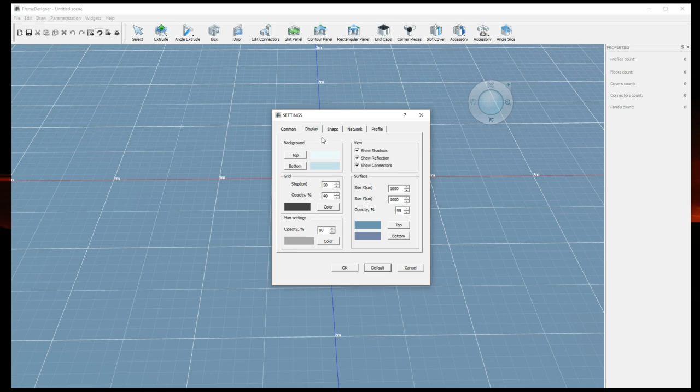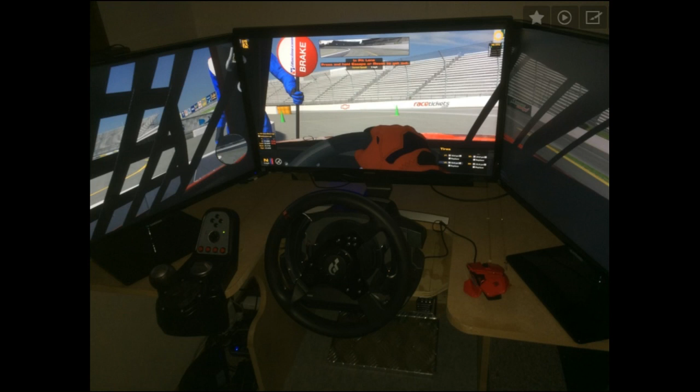So we've got to make it work, and here it is from an almost seating position. Now you can see, it's a T500 and T500 pedals. Since then I have upgraded to an OSW and HE pedals.

This is why I need to build a new one, as this wooden rig just isn't up to purpose anymore. It's getting shook to bits. My monitors shake every time I go over a bump. So as much as I love my little rig here that I built, it's time for it to go.

So let's get started here. As I said, I'm restricted for space, but let's start. I will be building the base. If you click on extrude here, click on the arrow, I'll be building the base out of 40mm profiles, so 40 by 80 for the base.

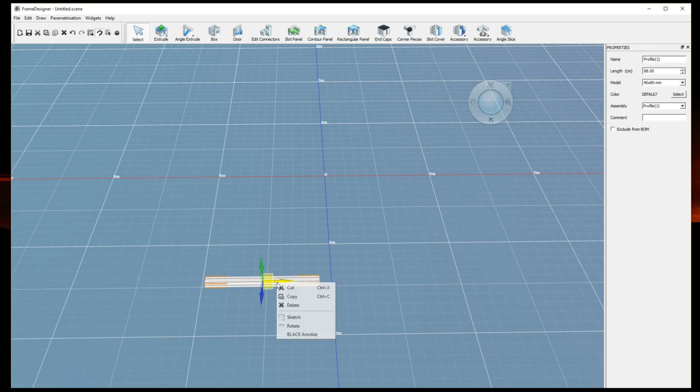And so this would be the wall-to-wall section, which is 1.4. Oh, let's delete that. Well, first let's just show you how to use the program. So this is right click of the mouse and holding it, and I can rotate my window. Center button, I can click and I can drag the window. And we'll show you the rest just in a moment.

So extrude, let's say 40 by 80. So we'll click and we'll drag, and I need to be 1.45. Finish width, 1.45. That's not right, it's 1.405, sorry, so it's 1.405, there we are.

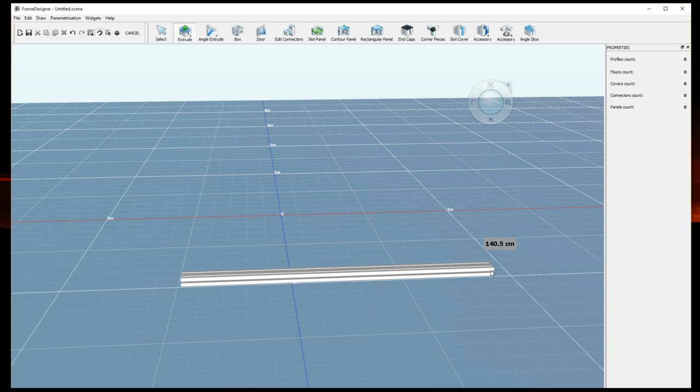So it's lying flat here, which is no good for me. I need it on its end. So if I right click, press rotate, and we'll rotate the red one, it'll stand on its end. So that's one side.

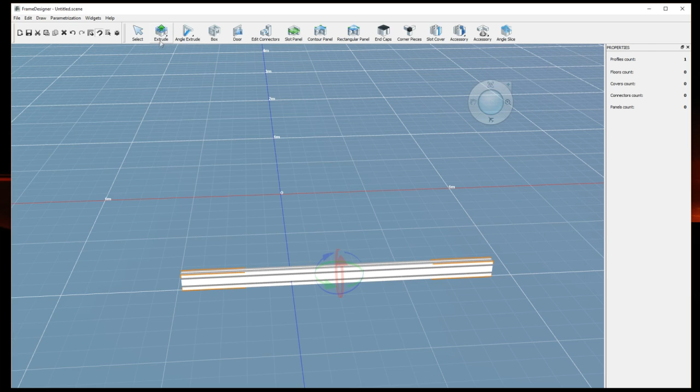Width now I can add in, so let's extrude again, same thing. Let's rotate that round, all the way to the end. This needs to be 505.

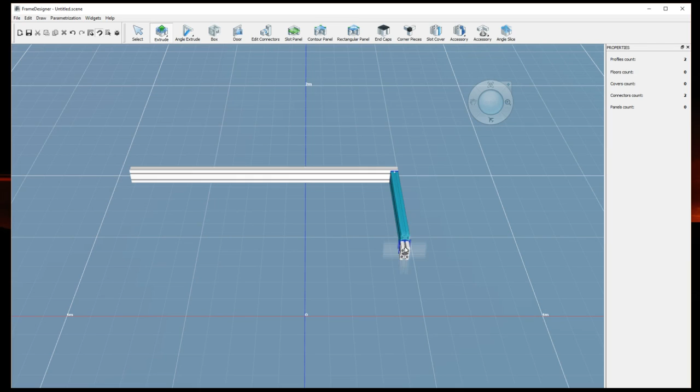And again, I can just copy this one, copy it, Control V to paste, and snap it to the end there. This one again, I can copy it, Control V to paste, let's just make sure we're putting it in the right place here.

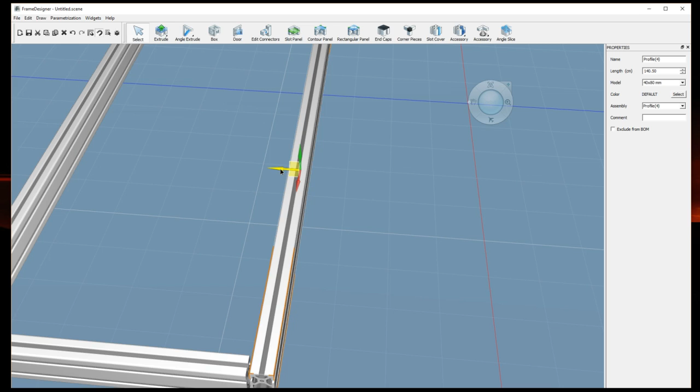So it doesn't look like I've put this right. See the blue section here, that means that it's connected. So that means I haven't put this in the right place. So if I left click on it, I can use the arrow to drag it into position, and there's the, you see the blue here? It's connected now.

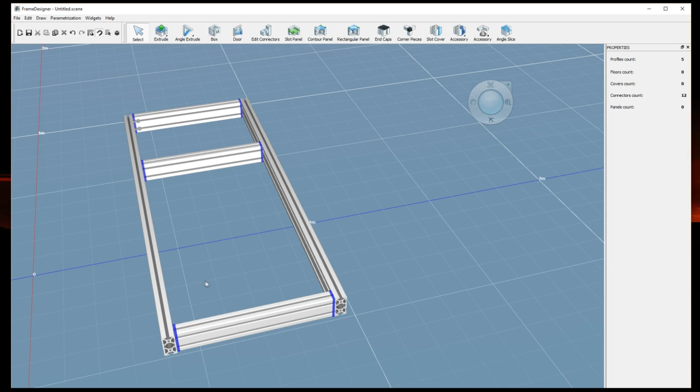Control V again, just for another one of these. So that would be my pedal spacing, well, my pedal deck, and Control V again, and here is basically where my seat will be. So these can move, they don't need to be exact at the moment.

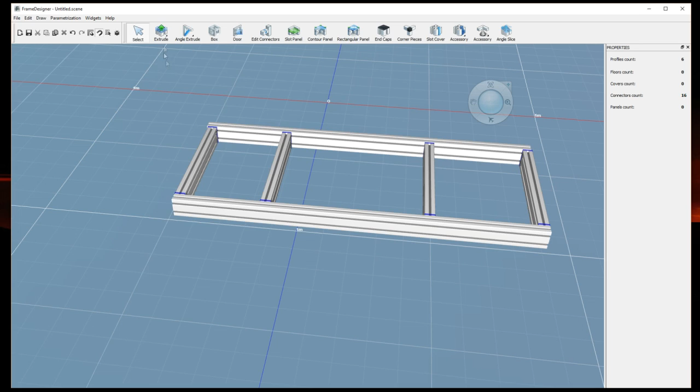So next up, what we need is our uprights for our monitor stand. So again, let's extrude. Do you see if I put it next to the material it's trying to come out, it's trying to extrude out the way, so I extrude off it, and then I can move it. Once I get it to the right height, I can move it to where I need it to be. So for these, I need 112 high for my monitors.

Let's go. There we go.

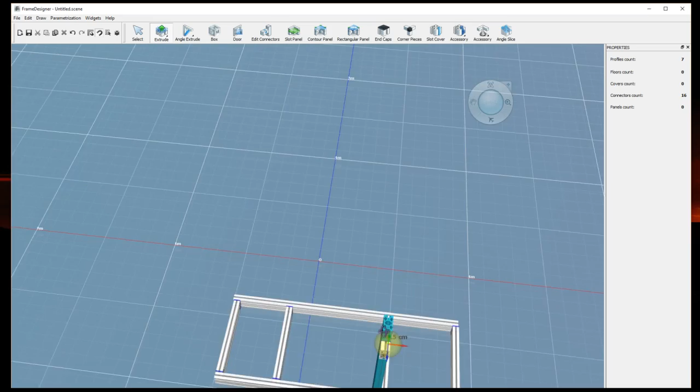Again, it's not obviously in the right place, so we want to rotate that. Use the green one this time, and then we want to move it till it meets this on the outside. So using the arrows again, and see it snaps into place there.

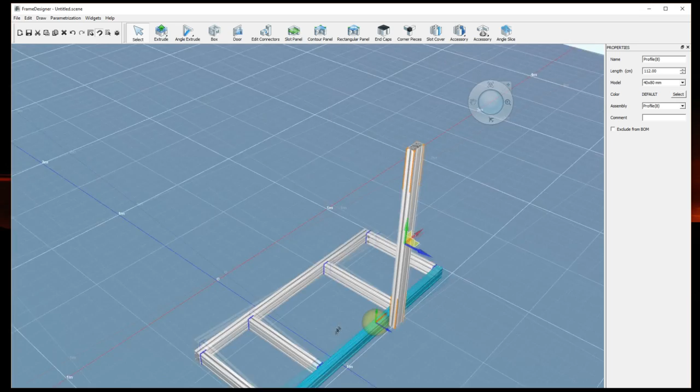Excuse my kids screaming up the stairs.

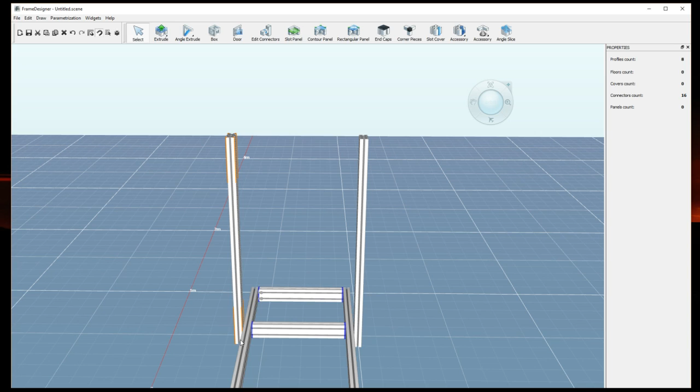So yet again, copy. Control V to paste, there we are. And let's just move it into the right position.

There we are. So at this point I will save it to make sure that there is an autosave getting made. So we'll save it here as video rig.

You see here I've actually already built this, but for the purpose of the video we'll start again. So now it should keep auto-saving every 3 minutes, so when it does crash, because believe me it will crash, at least I shouldn't lose too much work.

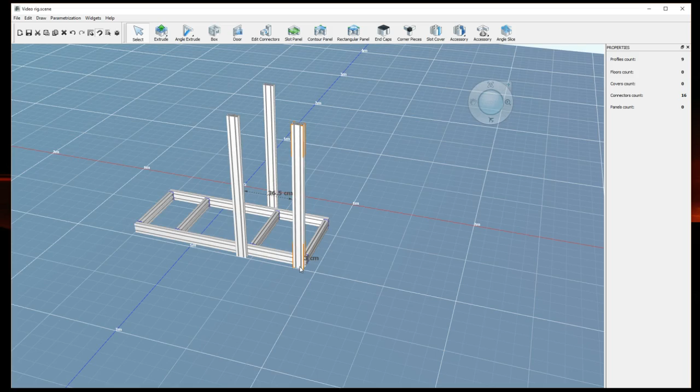So again, I can copy these and paste them in for the back, but what I'm going to do here is I'm going to change the height of these at the back, because they don't need to be that size.

So if I right click on it, I can stretch it and actually shrink it to my dimension that I want, which should be, I have it written down here, 585. And just click off it and done.

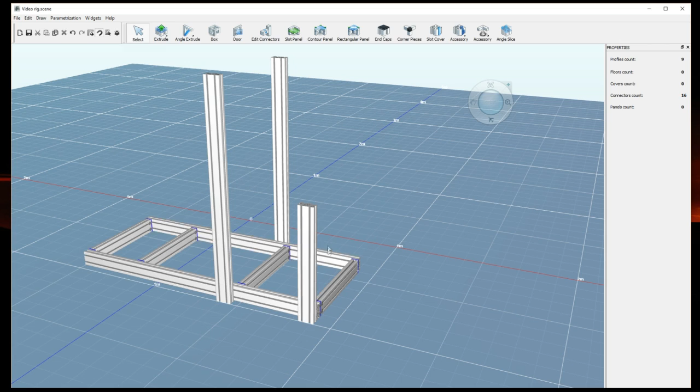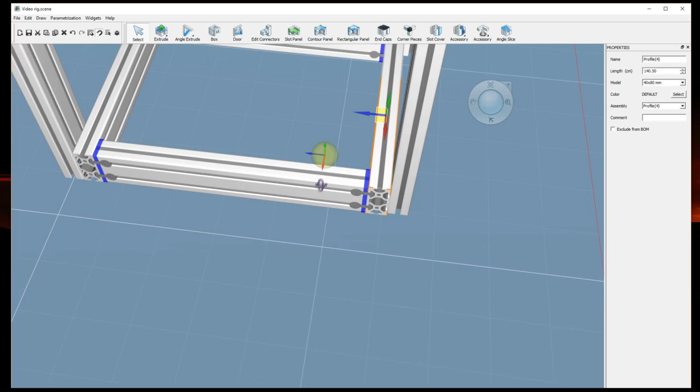So copy that one, paste it, and click it in there. I think I noticed there that that's not quite right, so this one I need to move. There we go, see the connectors there show that it's square at that point. I don't know if it matters that much though.

And now we can start doing my tabletop here. So that's a lot of the structure that's going to take most of the weight. That's why I've done it in 40/80. The rest of it I'll do in 40/40.

So click to there, and again that's not in the right place either, but we can move it. So I need another one of those across the middle here for the back of my pedals, because I invert my pedals, so like that. And on this side.

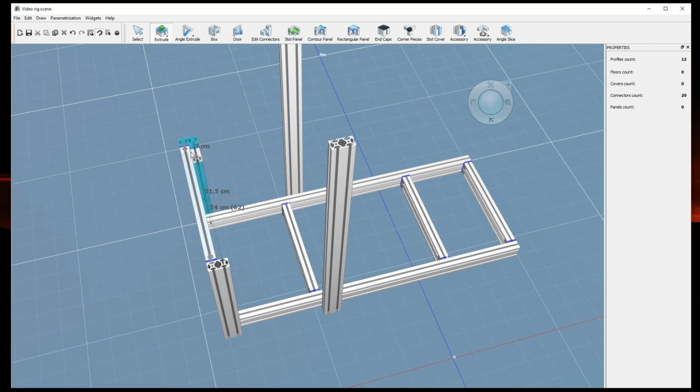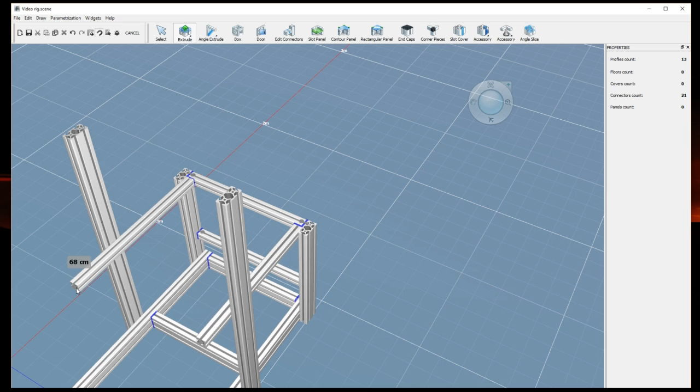So this needs to be a total of 635. So I'll put a wooden plate on the top here for my mouse. This one needs to be 670. And again, my gear lever, as you'll have seen in my pictures, is on this side. So my gear lever will go there.

So my PC needs to be at this point. So I'll put a plate on here for my PC. That's for the back of my wheel.

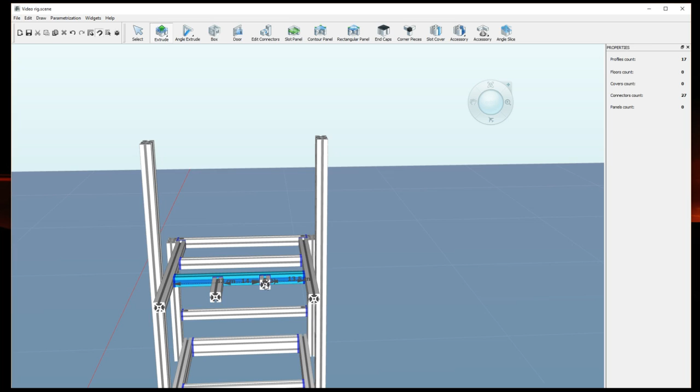And this needs to be 150 out. There we go. And the same distance on there, 150 out. And that'll be my wheel deck, will sit on these and on this back cross member.

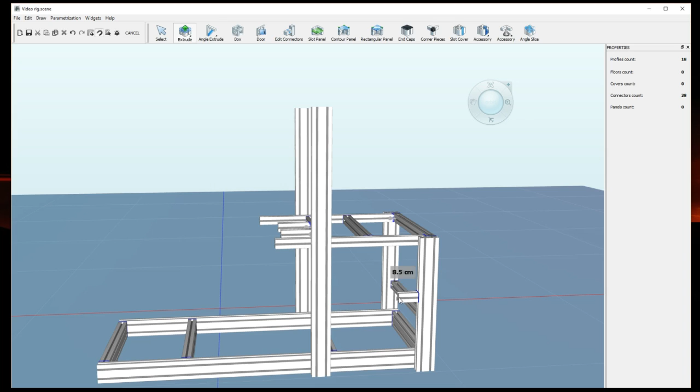So for the pedals, what I need to do is have it a bit higher here. So it is fine. See the line going across there, it's in exactly the same height, so 85 going across, and I need a cross member across here.

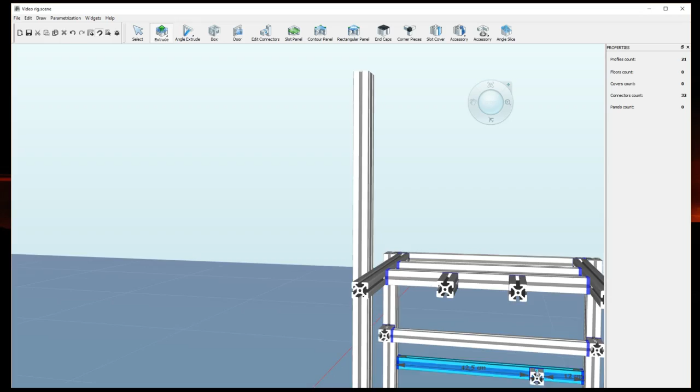So next up is to build the monitor stand section up here. So I'll be using the brackets from SimLabs for my angles for my triples. But what we'll do is show you how to get around that in the software here.

So back to the 40/80. I can't draw up here because the program will keep snapping my profile to there, so I'll just draw off to the right size, which is 900. And then I can right click it again and move it to where I need it to be.

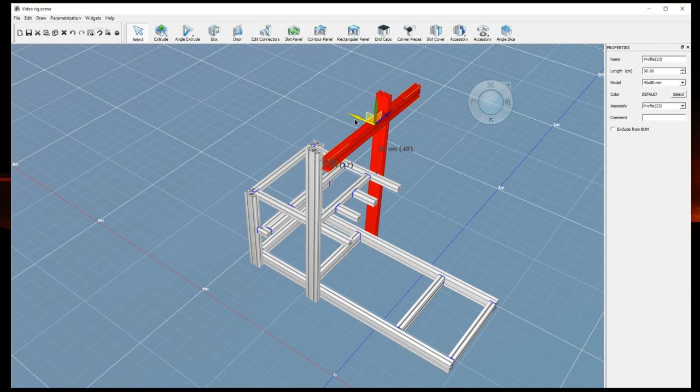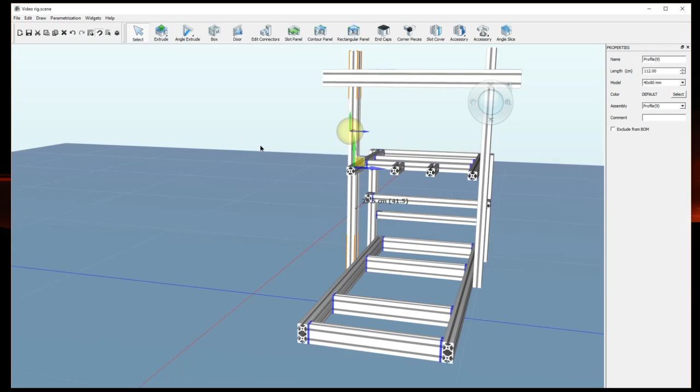We can see that this needs to move that way a little bit. Now we've got a basic rig. But from there I'm going to build my angled brackets over here.

If we go angle extrude, what this will do in the software is make the cut for you. Obviously it's going to cost you more to get these things cut to length if you're cutting angles and things on them, so I'll show you how to get around that.

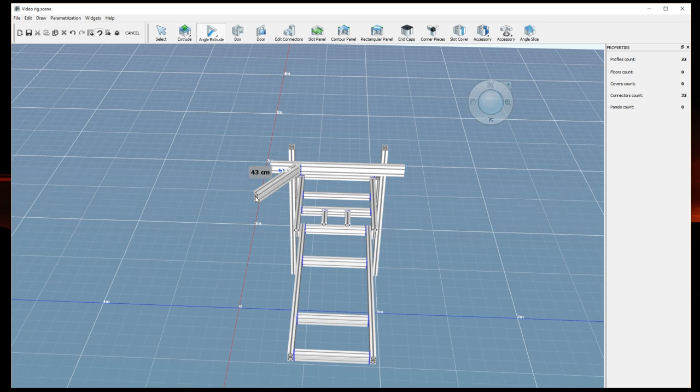I want to be to this side of it, so it's 16 centimeters in. Click it and then see it's putting the angle you want. You can set that to whichever angle you want, it changes in 5-degree increments. I'll set it to 55 here, and I need to be 430 out to catch my side monitors. Same on this side.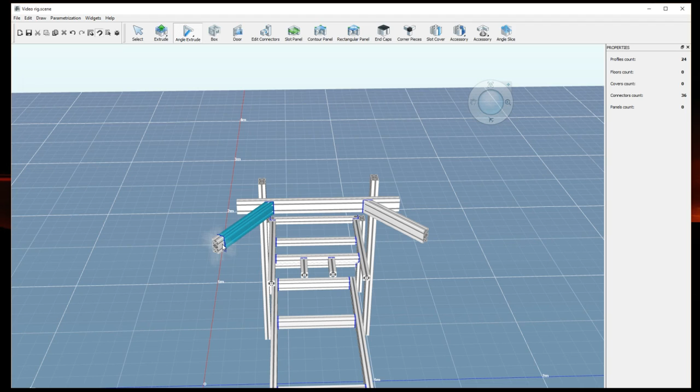Like I said, I don't want these angled cuts. So what I can do is go on the end of there and just draw an additional section to the size I want, which is 430. Right click on this one and delete it, and then just move this one back to where it needs to be.

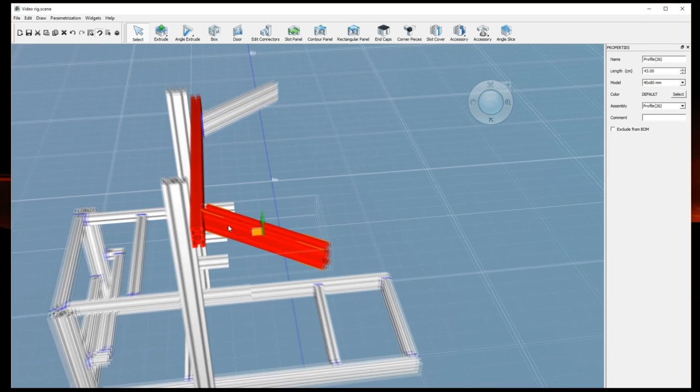So that's too far obviously. And there you can see, so it's just a regular 90-degree cut. We'll do the same with this side. Extrude. We've got a 430. Delete this section and move that section into position.

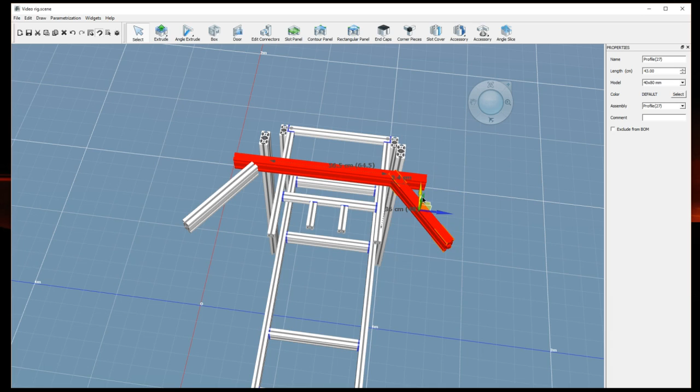This one is not in the right place, so let's bring that across to there. Further.

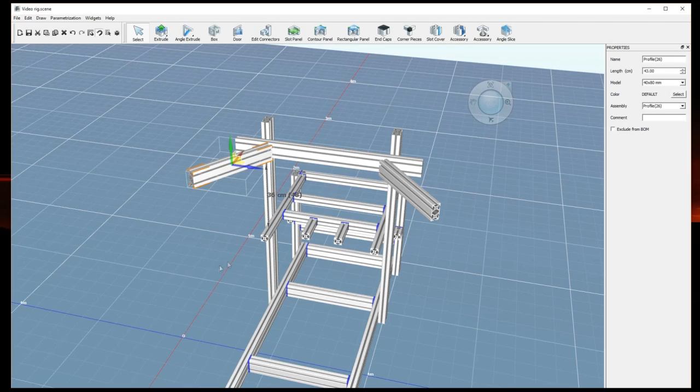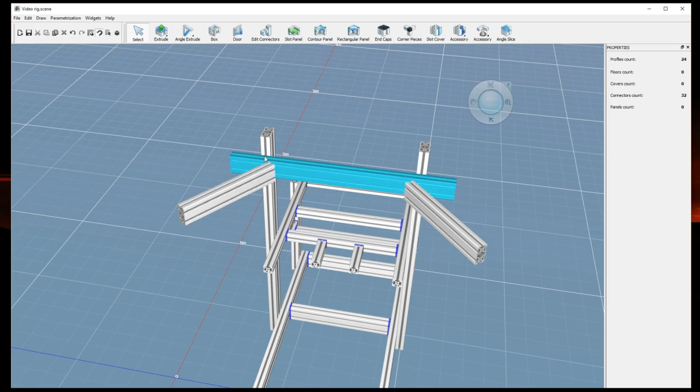So that's basically what we're going to do now, is add connectors and end caps and what have you. At these sections I have already pre-purchased the SimLab brackets, which look excellent. I've not yet to use them though.

We'll get the corner plates from SimLab for here, for holding these up, but the rest of these connectors we want to be using corner gussets, because if you look in here, let's put in these type of connectors, which are for the DIYer. This really isn't a good solution.

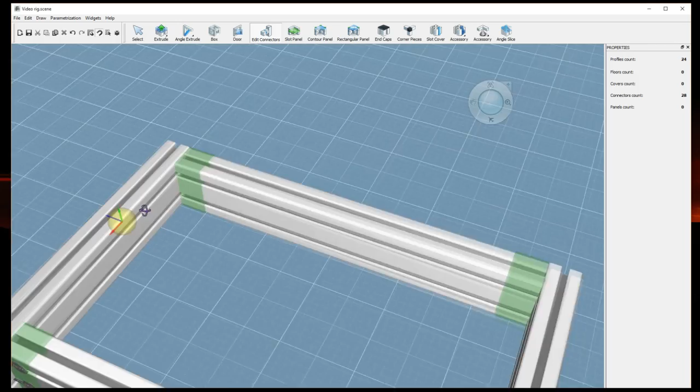So we want to edit connectors and take all of these things out. Just click on it and take them away. Press escape to come back out. Do the same on every other connector till you've got rid of all of these. You should be able to see on this side connectors count going down. You want that to go back to 0 before we start putting in our connectors for the DIYer.

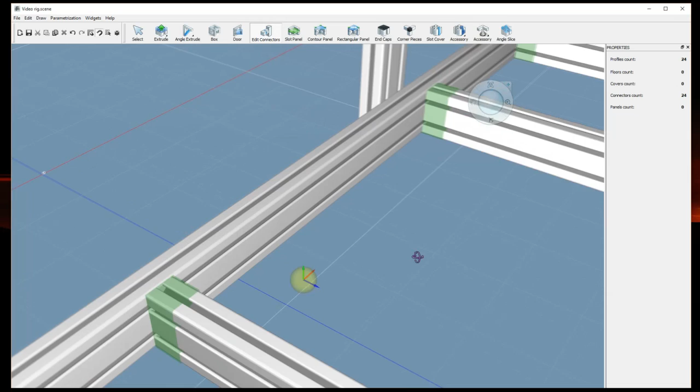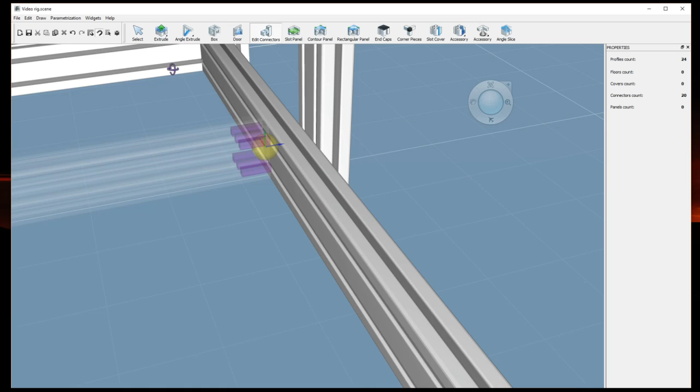So take these away. My connectors count's coming down all the time. Take those ones away. No connector here, take that one away. No connector there. Zoom into there, gone, gone, gone. No connector. Keep doing that till your connector count reads 0.

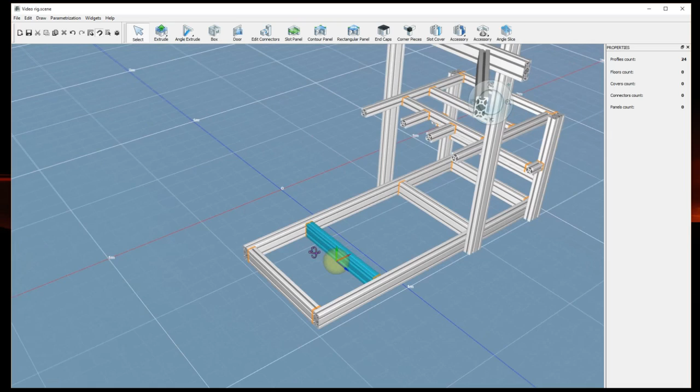So that's us, we've removed all those connectors the software puts in for us. As you can see, all these little blue bars, I've changed to orange now to show that they're not joined. So now we're going to join them with the type of connectors that are easily obtained and easier to use. In the software it's gusset, but you just buy your specific corner brackets for your profile from your aluminium supplier.

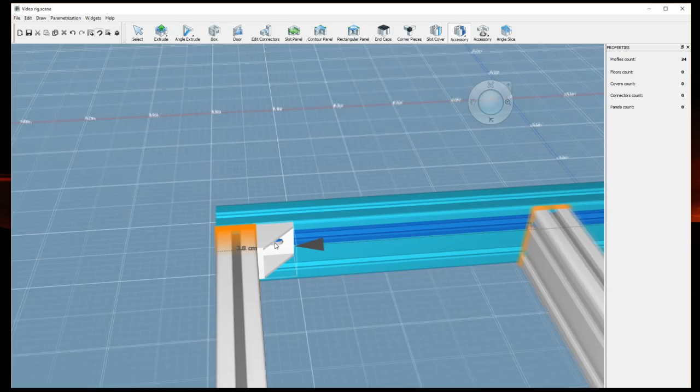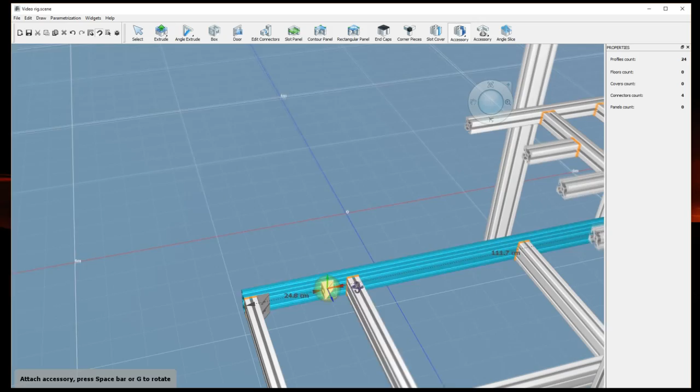You can see it's orange there on one piece showing it's getting connected to there, and that blue line shows that it's getting connected to that other section. And there you go, there's 2 bolts. Again, just to keep these things extra secure. There and there. There. And there.

So you just need to go around your design and make sure that you're putting in enough connectors anyway at each joint. Use space to rotate it. I'll put one on either side of this to make sure it doesn't move.

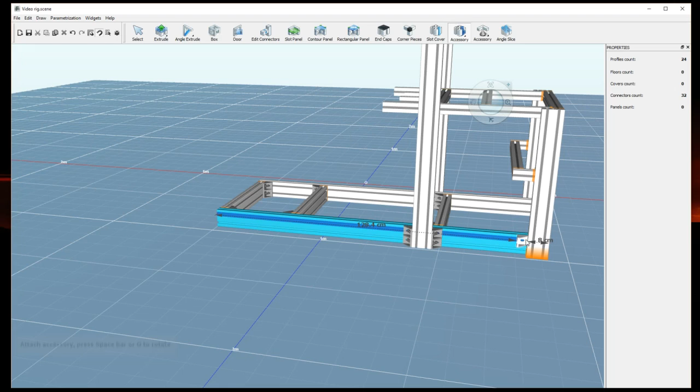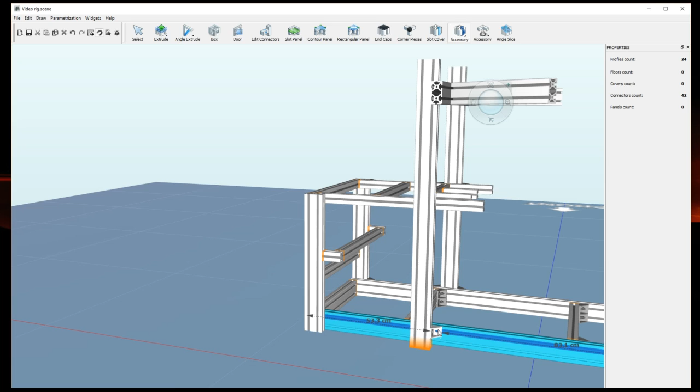There and there, and there. Just do the same on the other side. You see my connectors count's going up 2 at a time. So when it comes time for you to buy, because it's counting the bolts, you buy half the amount it says in that connectors count. But obviously you need the amount of bolts to cover it, because there's 2 bolts per connector.

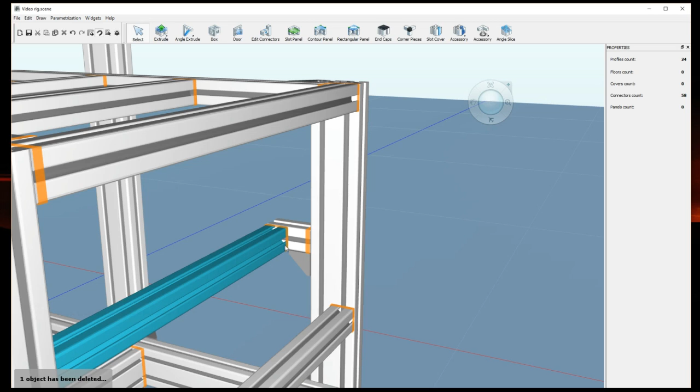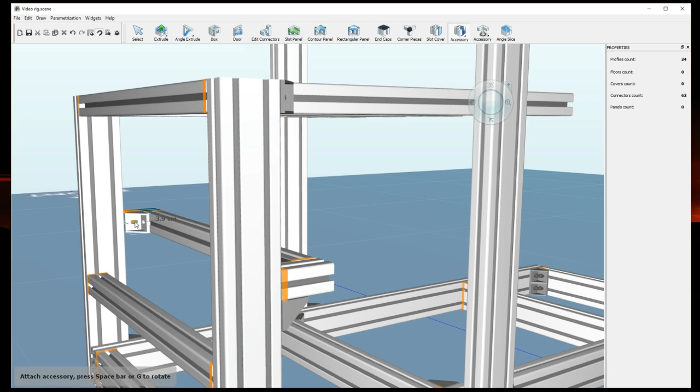And one there. You can see that it's not actually put a bolt in that one, so we've not done some right there. Let's put it on again. There we go. And again. Get it on there, and then there. There we go.

Again, just make sure you go around your design, and each joint has at least 1 connector on it, to make sure it's going to stay together. Is that right? That's wrong, let's delete that one.

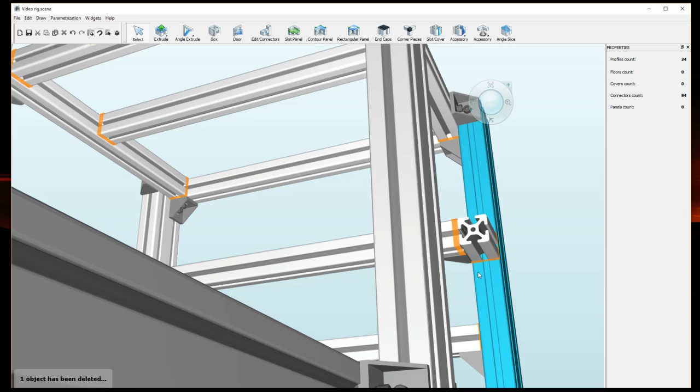That's better. And there's my first crash. We'll see how far back it sent us, since I saved it just before I started doing the connectors. There's no point sending a report because no one is really looking after these programs anymore.

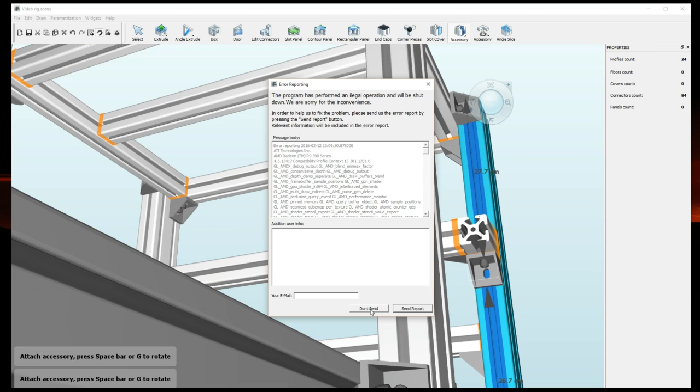Opening back up, we have zero connectors added, but at least that's the only thing I've lost. I haven't actually lost any of my work putting the profiles in. So I'll quickly add these back in, and through the magic of video editing, we'll be back in two minutes.

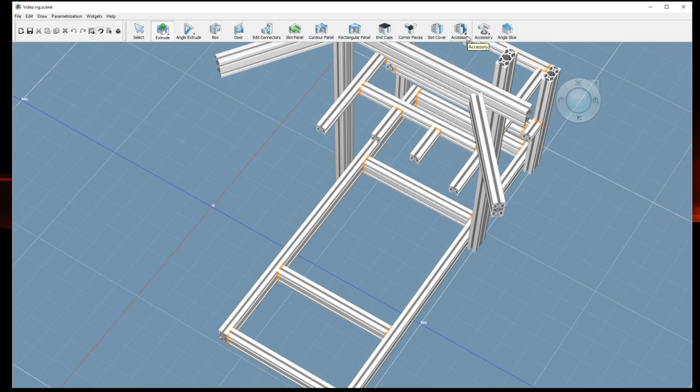So this is back after adding all the connectors. As you can see, some of the ones that take more stress, I've put two on either side, like either side of that, because this is holding my wheel. They're under here and on the sides, just to make sure the thing is as rock solid as it can be. It might be overkill, but I'd rather it was stronger than weaker.

So what we can do now is go around and put some end caps on some of these other bits, just to tidy things up a little.

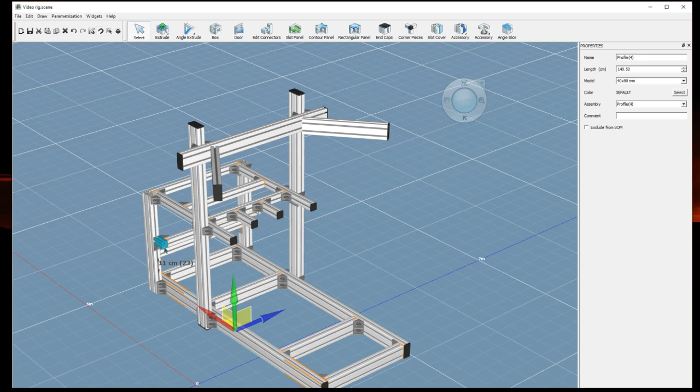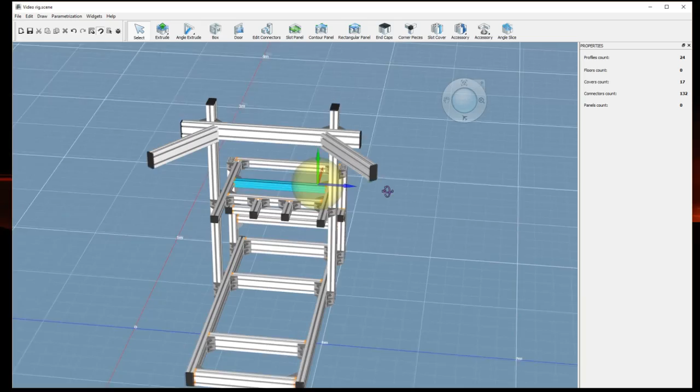You'll notice here it won't put an end cap on this particular profile because this bracket's too close to it, so it won't fit. You can buy them and try to force it yourself, but the software won't put it on. And that is a basic rig.

Some ideas you may want to do yourself: rather than having these big long pillars all the way up to your monitor stand, you could stop them here, so go from there to there, and then have these on the outside a little bit longer, allowing an extra bit of adjustment in height. If you're speccing this to your own measurements, you should be alright.

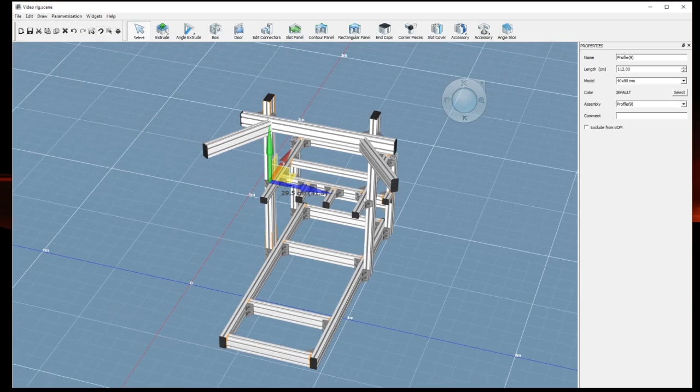So I'll quickly open up one of the ones I've done before and show you a way around these angles, if you don't want to buy brackets from anyone, or you don't have the ability to make your own.

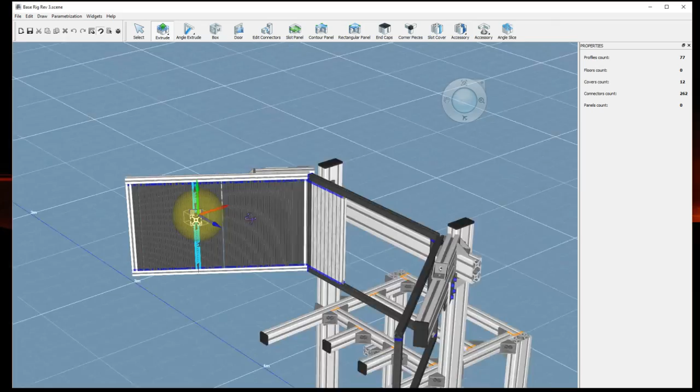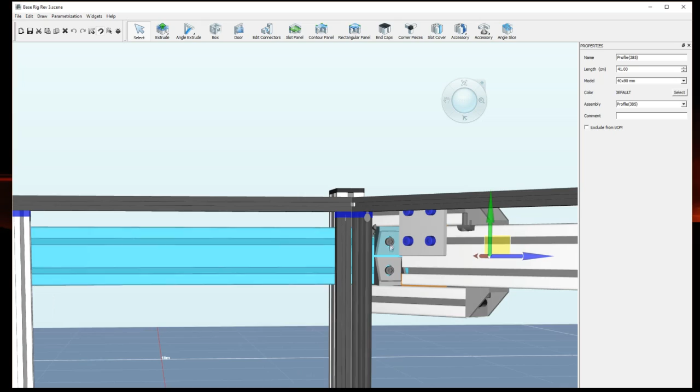So you can see here I've actually been simulating monitors on this one, but if we zoom in on this corner here, you can see what I've done. I've got the same profile, but I've got a plate to shore it up here, a plate on the top one, and just two small sections held by a bracket on the top, bracket on the bottom, and two in there. Now this will be a bit harder to put together.

And it costs roughly the same in materials as the SimLab brackets, but if you wanted to do something else, or shipping to America for instance was too high, there is an alternative for you.

And so that's how to use Frame Xpert.

Okay, so once we've finished the design, we would want to double check the connector count, like I said. So we're at 132, that's 66 connectors, 132 bolts. Your covers are at 17, but obviously they're different sizes, so you need to go through and manually count those up.

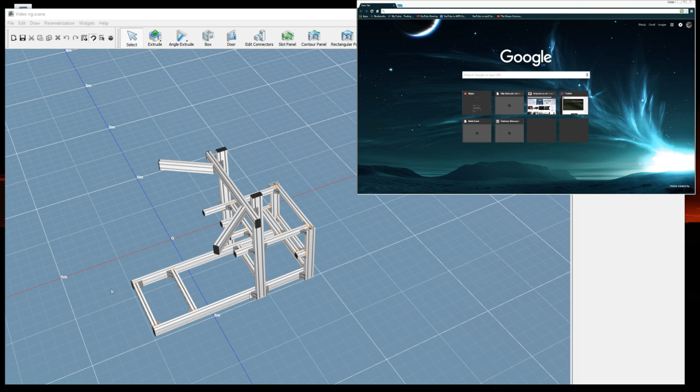And then you go to the website of your choice for your profile. In my case it'll be Motedis. Okay, so slot profiles, we want 40s.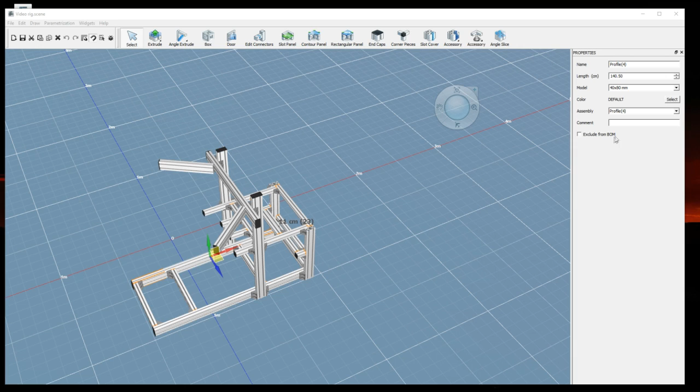And then just go through your design and pick up the things you need. So 40 by 80, for instance, I would be looking for pieces if I check on my design here. If I just click on that, it shows under the window I've got up there. We'll just do that window down there. So it shows up here the length, 140.5. Let's bring that back, so in millimeters that's 1405.

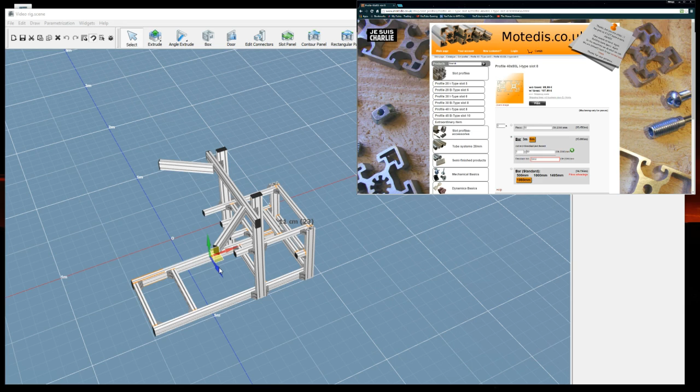And we actually want two of those, do that, continue shopping, and just do the same thing for every other profile, until you have your whole shopping list of profiles at least.

So from there we go for slot profile accessories, once you've got all your profiles. It'll be accessory type 40. And these things are on my design, these things here, okay, just like that, and we want it with the fastening set, so that means we get 2 bolts and 2 backs to each of the bolts.

Bags of 50, I need, according to the design we made there, 66 wasn't it, so I would probably take 150, add to the shopping cart, then the shopping, and I would probably just take an extra 2 bags just to be on the safe side.

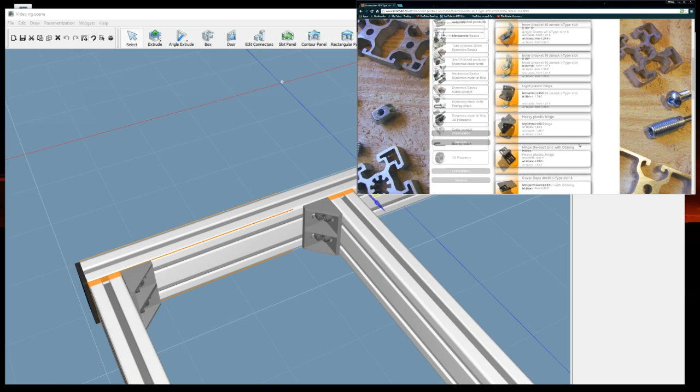Right, and then back to Type 40 Pro accessories. So there's your caps for the square ones, and further in the list there's caps for the 40 by 80 profile. There we are, 40 by 80.

So you would add what you want from them, add it to your shopping list, and then everything should arrive at your door pre-cut and just ready to assemble.

So that was my how-to on designing and ordering at least your parts. I will do a follow-up video once my parts arrive on how well this all goes together. So that's it for now guys, thanks for watching.